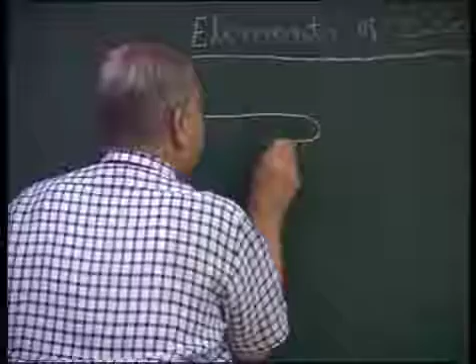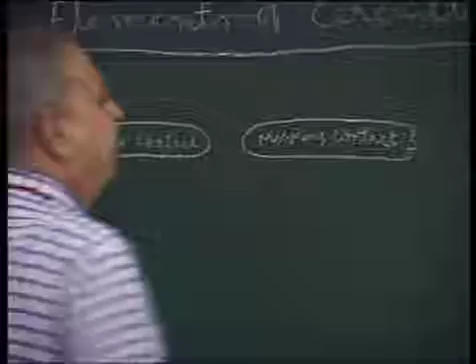Now, in a circuit breaker, there is a fixed contact and there is a moving contact. The moving contact is pressed against the fixed contact under a spring force, and then it is locked.

When a circuit breaker is required to operate, then the lock is pulled out. So violently, under the spring force, the moving contact moves away from the fixed contact and a gap is created in the circuit, and that ultimately switches off the circuit breaker.

In order to keep the contact resistance low during the closed period of the circuit breaker, the fixed and moving contacts are silver plated. A cadmium silver alloy is used for plating the fixed contact and moving contact. This is because silver is malleable, and when the moving contact presses firmly over the fixed contact, the silver gets flattened out and the area of contact between the fixed contact and the moving electrode is maximized. That gives minimum ohm resistance of the circuit breaker.

Now, when the lock is removed and the moving contact quickly moves away from the fixed contact, an arc strikes. And due to this arc, the current does not become suddenly zero till this arc is extinguished. So the entire theory of circuit breaker is how to quench this arc as quickly as possible so that damage is minimized. So we will study how to quench the arc.

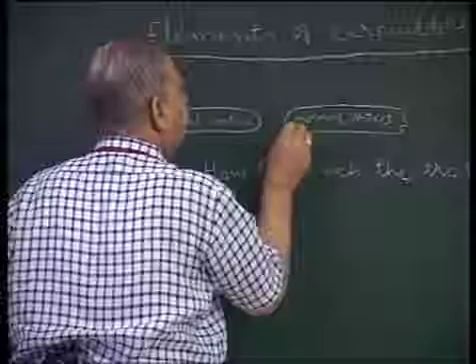Now there are two important components of this voltage. One component is power frequency, and the other component is transient high frequency. As before, opening the circuit breaker, the current and voltages were not in phase. During fault conditions, the power factor is almost 0 lagging, and voltage is leading the current by approximately 90 degrees.

That is, the power frequency component will be such that when the current naturally becomes 0 and the arc extinguishes by itself, at that time the power frequency voltage will be almost at the peak value. And this voltage will rise from 0 to the peak value within a very short period and appear across the contacts.

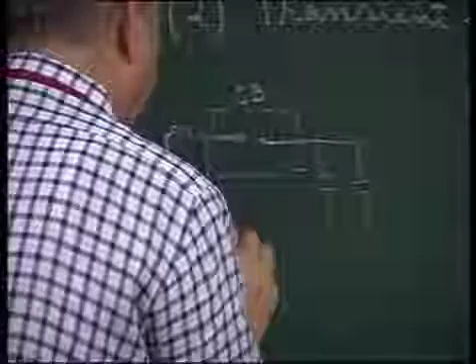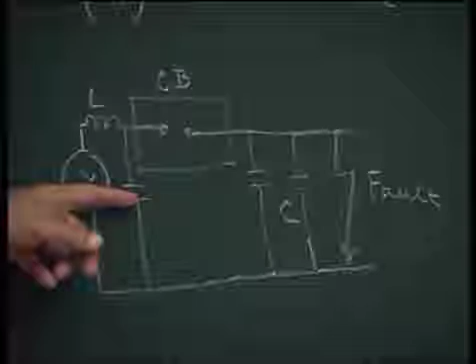So, if this is a source, this is a circuit breaker, so source, a circuit breaker, and there is a fault over here. L is the inductance in the circuit, resistance is very small in the circuit compared to inductance. This is a stray capacitance, and these are again stray capacitances up to the fault point.

At natural current 0, this arc vanishes. The arc at the fault also vanishes for a short period at natural current 0, and these capacitances will like to charge to the maximum voltage of the source, and therefore oscillation will be established between this inductance and these capacitances.

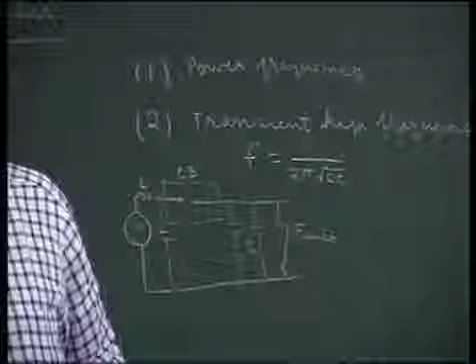Frequency of these oscillations - this will be the frequency of the oscillations. As inductance and capacitances are extremely low, the frequency is very high, of the order of several tens of kilohertz. So that high frequency voltage will also appear, and the power frequency voltage will also appear.

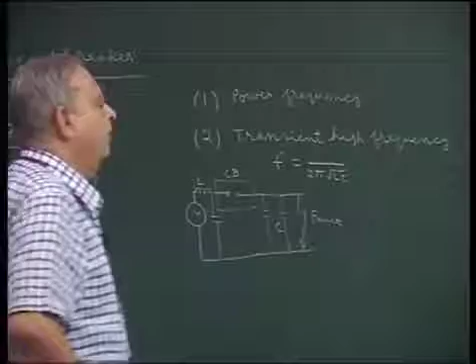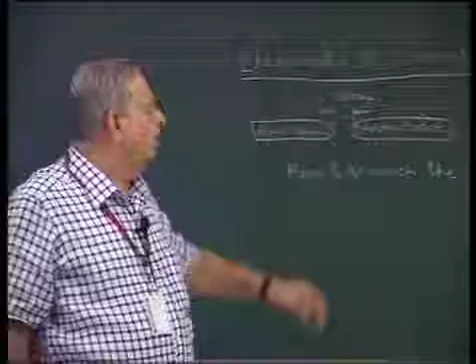Now, whether due to these voltages the arc will restrike or will it not restrike? We should create such situations so that the arc does not restrike. Now, there are two theories to explain whether the arc will strike or the arc will not restrike. The contacts are open, and in all circuit breakers, we make efforts to cool the arc path. This path we will try to cool by forcing more media in between the contacts. Also, we will generate mechanical forces to mechanically move away the ions due to previous discharge.

Now, the rate of rise of restriking voltage theory says that the arc will restrike if the rate of rise of voltage across the contact is higher than the rate of recovery of the dielectric. That is, if the dielectric recovers very fast and the rate of rise of voltage across the contact just after current 0 is not high enough, in that case the arc will not restrike and circuit breaker will successfully open.

And vice versa, if the rate of rise of restriking voltage is high and rate of rise of dielectric strength is not that high, in that case the arc will restrike. So efforts should be made to reduce the rate of rise of restriking voltage so that this may not happen.

Other theory is the heat balance theory. The heat balance theory says that when the contacts are separated, then some ions are in the contact, so there is a resistance due to previous ions present in the arc path. And if the voltage across the contact at any instant is V, then heat generated in the contact region is V square upon R.

So this resistance is R, and heat generated will be V square upon R. This arc resistance is between the contacts due to ions present due to current flowing before current 0. So V square upon R is the heat generated in the contact region, and there is a certain rate at which we are removing the heat by conduction in the media, by convection in the media, by mechanical force developed to remove the ions away from it, and recombination of ions which may also occur naturally.

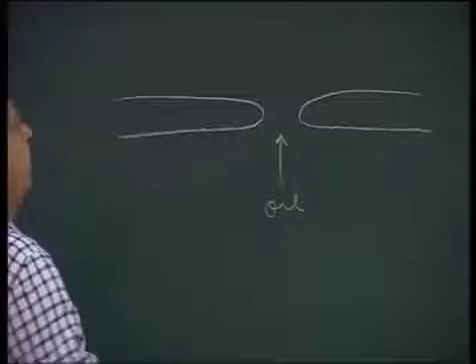Or we can force the oil to flow like this. Efforts will be to remove the ions present in the arc path. This is called a cross blast, and this is called an axial blast.

In the axial blast, the quenching medium or cooling medium is passed along the axis of the electrodes, and in cross blast, the cooling medium is forced perpendicular to the arc so as to blow out the arc.

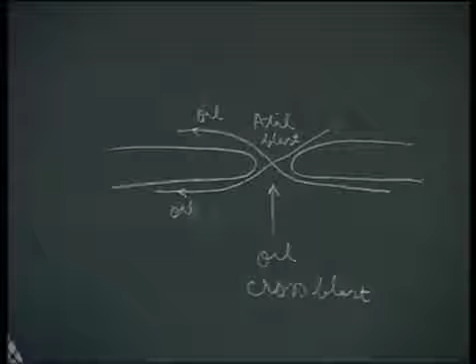Now we understand that in the cross blast, the arc may be blown out very quickly. And in the axial blast, the force on the arc to blow it out is not as strong as in the cross blast.

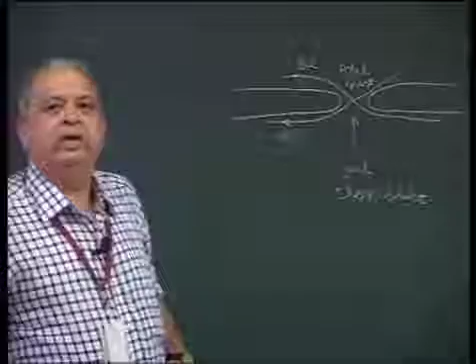Now we will try to see that if the arc is blown out very quickly, that is before the natural current zero, then there is a phenomenon called chopping. Chopping is the phenomenon of blowing out the arc before the occurrence of natural current zero.

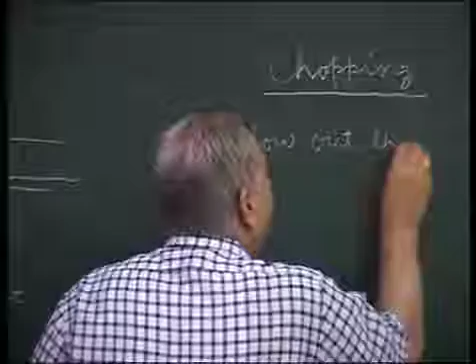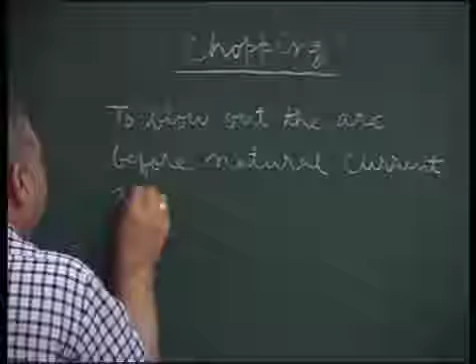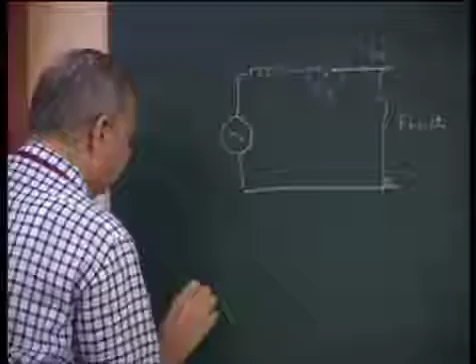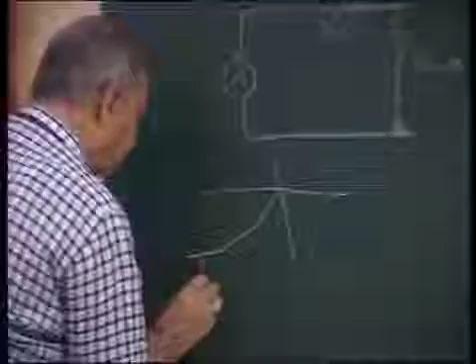Now in the circuit, the arc current flowing at some instant is equal to IA. And if the arc is blown out, say somewhere here itself, where the current IA has not reached natural current zero, but before that we are blowing it out from here.

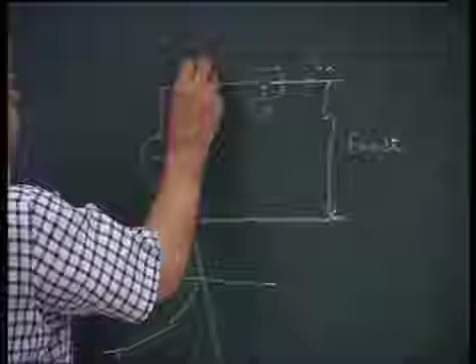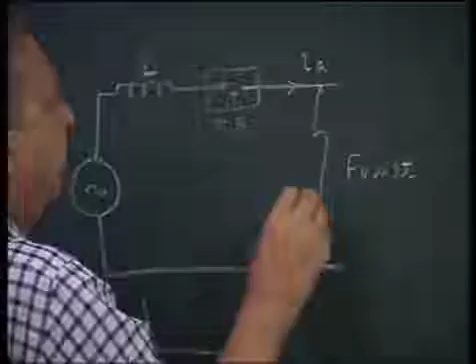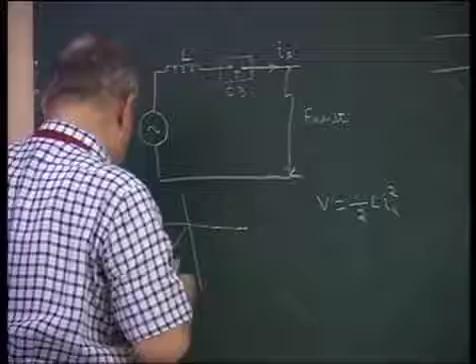There is an inductance, and the effect will be that a high voltage will get induced, equal to what we can write down. So capital V is the maximum transient voltage. Cos of 1 by root LC into T is the wave of high frequency transients.

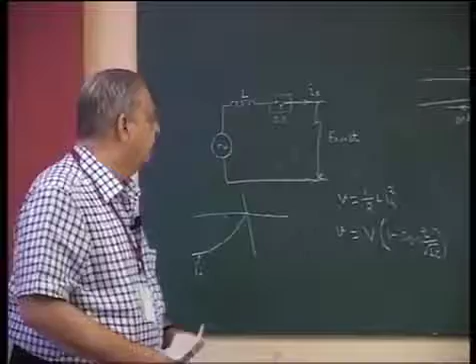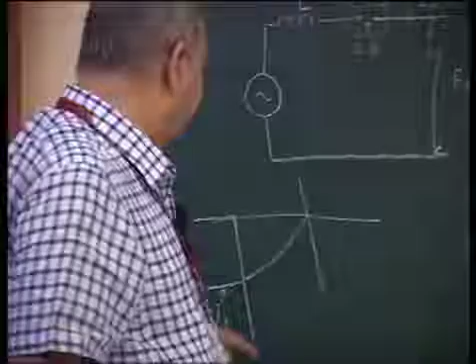Then at any instant T, the voltage induced here, that is between these two points, will be given by this expression. So this is a very high voltage so produced. At this instant, the voltage was zero, and now the voltage suddenly rises to a very high value like this.

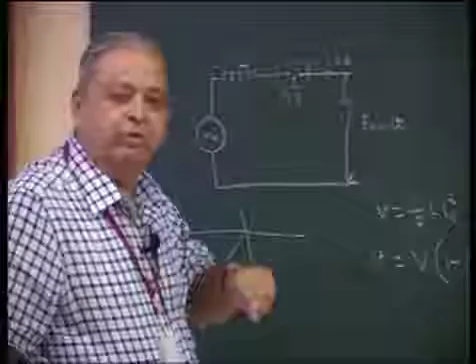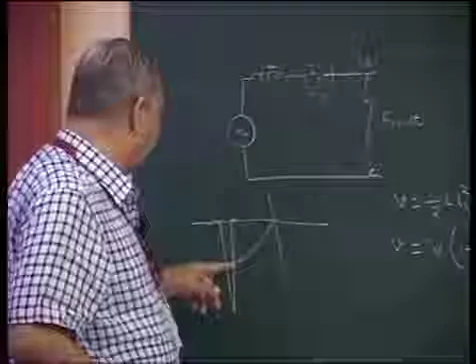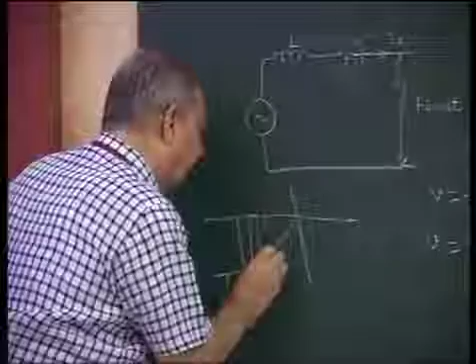And due to this high voltage, the arc again restrikes. It was broken before natural current zero. Now it will restrike before natural current zero. And when it restrikes, the voltage again goes down to zero. Then as this blast is going on, a comparatively weaker arc, now because of lower current, will definitely break the gap and it will restrike the arc, and again the voltage will become zero.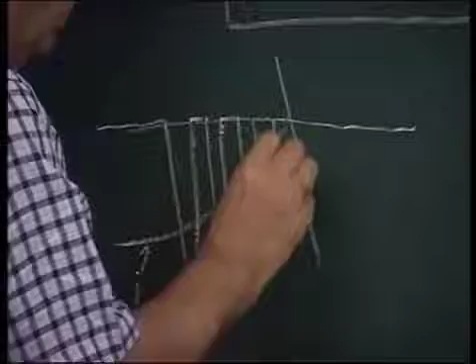Again there is a restrike, and so on till natural current zero comes, and when natural current zero comes, it will not restrike again because the induced voltage will be zero at natural current zero.

So here the current chopping phenomenon gives rise to multiple pulses of high voltage. A single high voltage pulse can be withstood by an insulator, but if multiple high voltage pulses of the same voltage are applied to an insulator, it may fail. So supporting porcelain insulators of the circuit breaker may fail due to this current chopping phenomenon.

So this gives an additional restraint in the design of circuit breakers, that we should apply the blast of oil or air or whatever it is, so that the arc may not restrike after natural current zero. But it should not be so strong that it leads to current chopping.

So current chopping is also harmful, and allowing the arc to restrike will give rise to repeated arcing and therefore delay the opening of the circuit breaker.

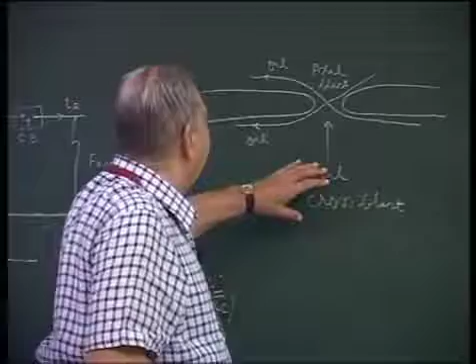Due to this reason, some circuit breakers are designed such that the arc is blown out by axial or radial or a combination of axial and radial force generated by the heat produced by the arc. So if the heat produced by the arc is more, more force to blow out the arc is produced, and vice versa. So for lower fault currents, less blowing out force is produced so that current chopping may not occur, but as the current is low, a lower blast will do to quench it at natural current zero, and vice versa.

Whereas in certain circuit breakers, like air blast circuit breakers, the force to blow out the arc is constant, whether the current is low or high. In both cases it is the same force, and there is a greater possibility of occurrence of current chopping.

Now another method to weaken the arc is resistance switching.

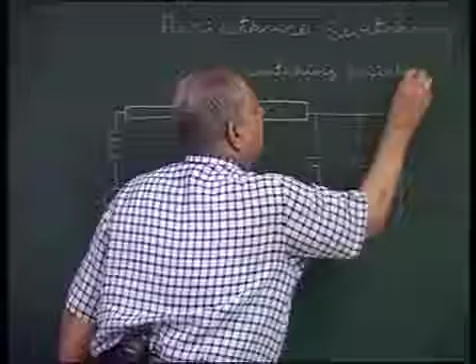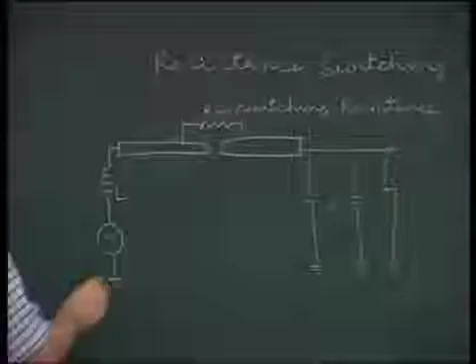Now, if you put a resistance here, this resistance will come in series with the LC circuit, and the frequency of oscillation is modified.

The high frequency transient oscillation frequency is modified, and it is given by this relation. R is also called a damping resistance. If R is low, the second term will be higher.

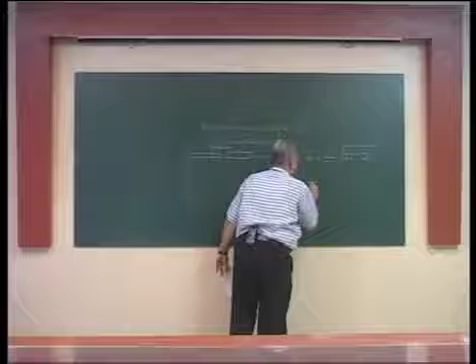So there will be oscillations as long as the second term is lower than the first term. And if R is low enough, and it is greater than or equal to 1 upon LC, there are no oscillations.

So, by properly choosing the value of R, it is possible to totally stop the high frequency transient oscillations.

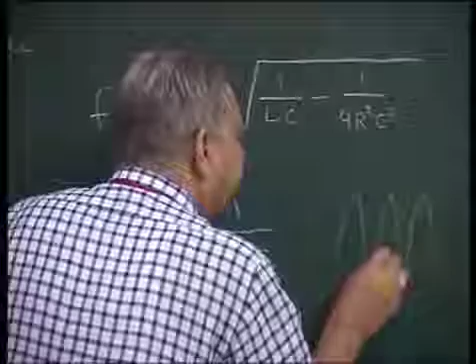And high frequency transient oscillations are the bigger culprit for restriking the arc, because when the voltage is varying very quickly at high frequency, the rate of rise becomes very high as compared to 50 cycle voltage. The rate of rise is very low.

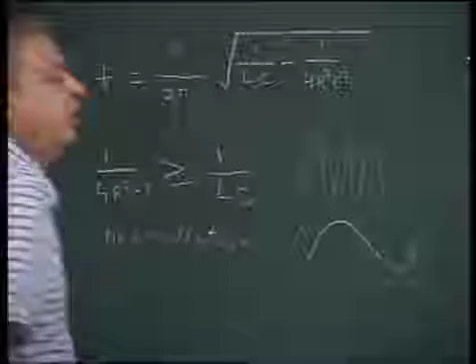So, power frequency rise of voltage is not much responsible for restriking of the arc after the natural current zero. But the bigger culprit is the high frequency voltage, whose rate of rise is very high.

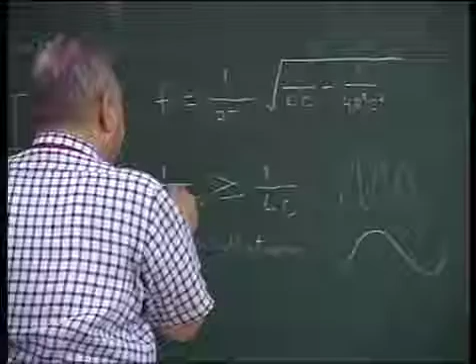And if this high frequency voltage is totally quenched by properly choosing the switching resistance, then the possibility of restriking becomes extremely low.

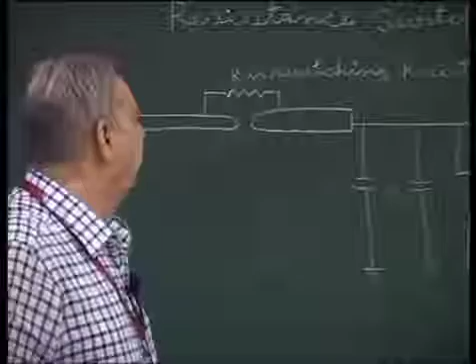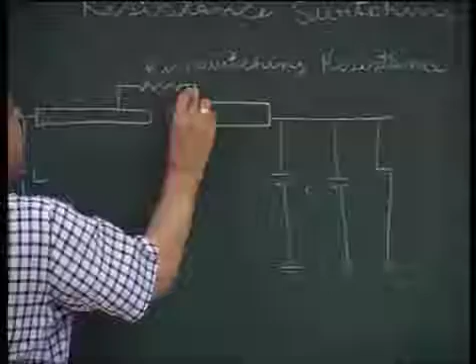But this current may stop, yet this current continues to flow, and we have to put a smaller switch in series with this to produce a weak arc due to this resistance switching.

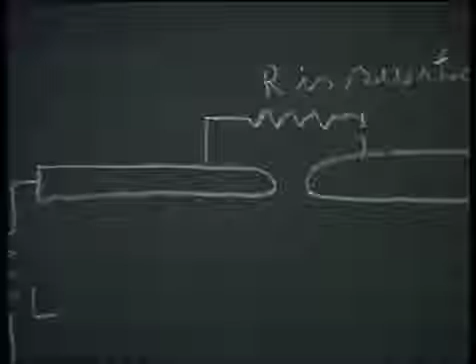So, switching is done in two steps. First we stop the main arc, and then we stop the auxiliary arc.

In bulk oil circuit breaker, a tank filled with mineral oil, that is the transformer oil, is taken, and fixed and moving contacts are arranged inside it.

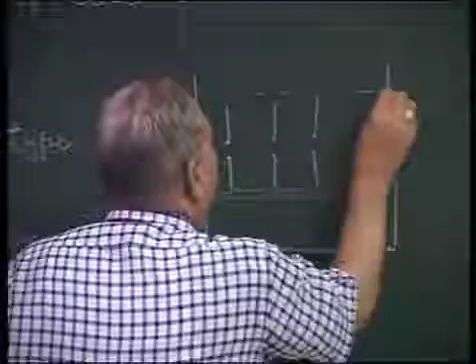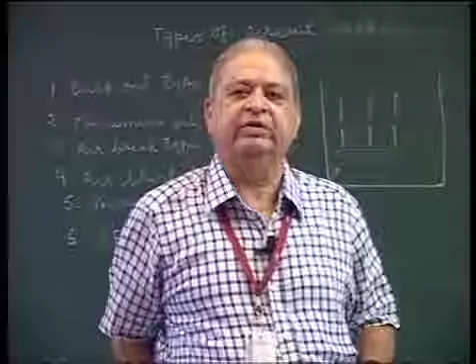So, fixed and moving contacts of all the three phases are dipped in the oil tank. Sufficient clearance is kept between the contacts of different phases and between the contacts and the wall of the tank.

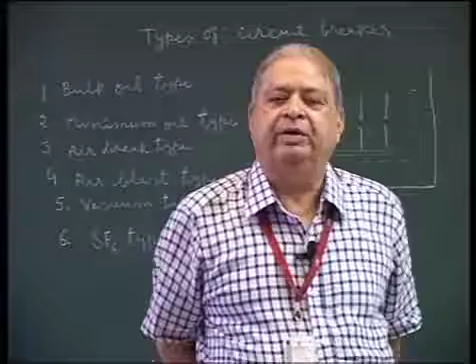When the lower contacts, that is the moving contact, are lowered down, the arc strikes. The arc is quenched by the heat taken away by the oil due to the conduction process as well as due to the convection process.

So, that is the cooling. Cooling is very mild and it can be used only for lower voltages and lower current. So, oil is doing both the functions of insulating the different phases and earth, and also for cooling the arc.

Due to large amount of oil required, the circuit breaker is costly as the cost of oil is high, and at the same time this is a slow circuit breaker, meaning the arc restrikes several times before it is quenched. So, this is a comparatively slow circuit breaker.

But the advantage is that products of the arc, that is the carbon particles and other burnt oil gases which are produced, are of low percentage compared to the bulk of oil. So, the impurities disseminate in the oil and the quality of the oil is not much deteriorated, and therefore it can be used where faults occur very frequently, like in rural lines where faults are more frequent. This can handle that type of situation.

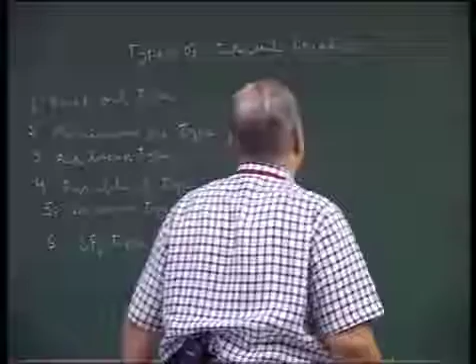So, this is an insulator for the R phase, and there is a separate insulator for the Y phase, and a separate insulator for the B phase. Now, each is a hollow porcelain insulator, and inside the hollow porcelain insulator we have a fixed contact and a moving contact.

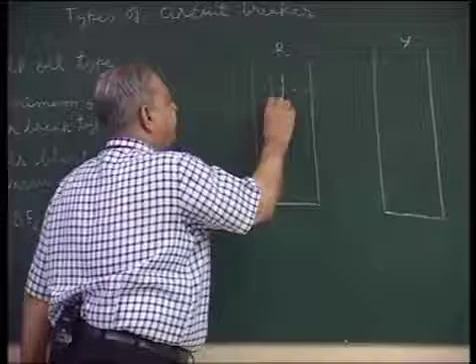This portion is filled with oil, like this, here also like this. This is for the R phase, this is for Y phase, and this is for B phase. These contacts are insulated from earth due to insulation porcelain present here, and between these two the insulation is provided by the porcelain on both. So the oil required for insulation purposes is avoided. Now when the contacts separate, the arc is struck between these two points, and only this much oil will participate in the arc quenching.

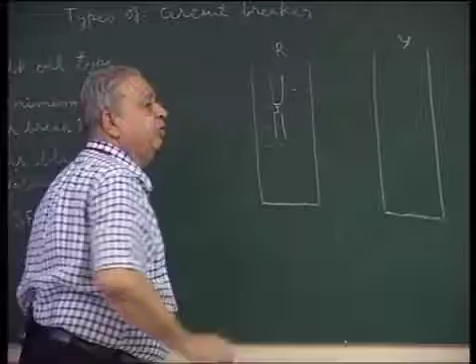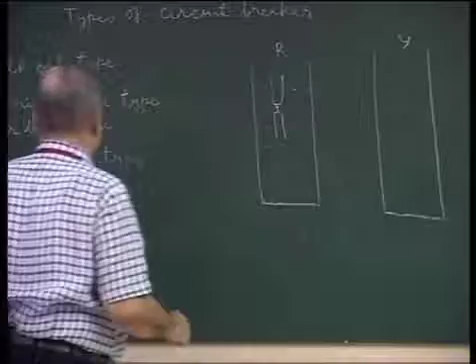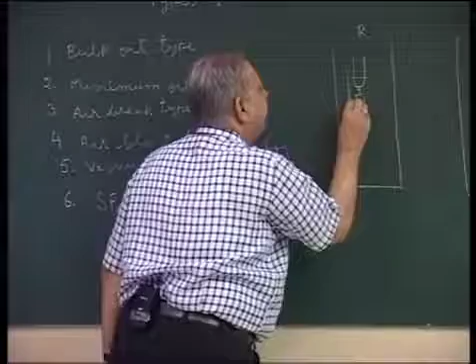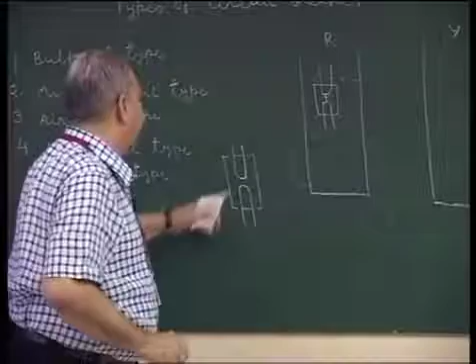As this oil is insufficient, we put arc chutes. An arc chute is a small cylinder kept around the arc, and there are windows cut on the periphery of the arc chutes. Also the fit is not tight, it is a loose fit, so that when the arc strikes, the oil can flow like this, and due to the windows present on the periphery, the oil will also move. So oil moves outside these chutes axially as well as radially, and therefore remaining oil in the bushing is also utilized for arc quenching purposes.

A minimum oil circuit breaker requires only 10% oil as compared to a bulk oil circuit breaker. So there is a great saving in the amount of oil, but in each break some oil gets evaporated, some oil gets burnt due to arc, and frequently after 4 or 5 breaks we may have to check the oil level and top up the oil.

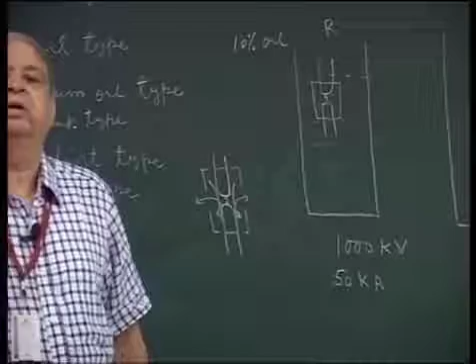Minimum oil breakers have been designed for voltages up to 1000 kV and for currents up to 50 kiloamperes. This is the most popular circuit breaker in most substations, because it can satisfy most requirements. These are again low duty circuit breakers, and they use only air.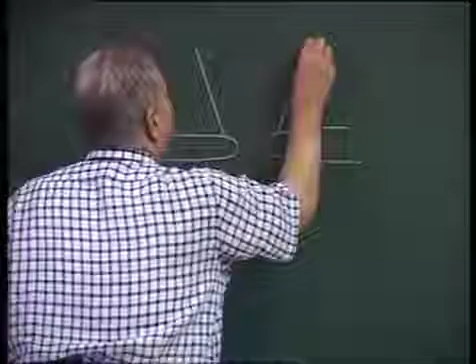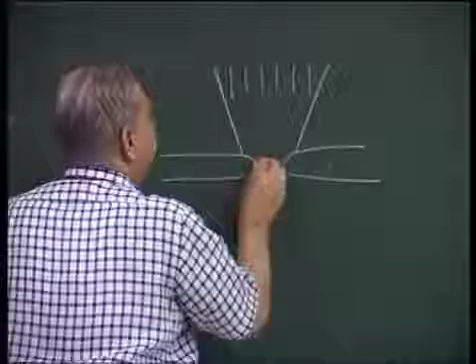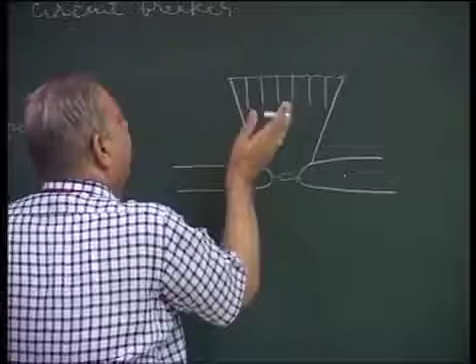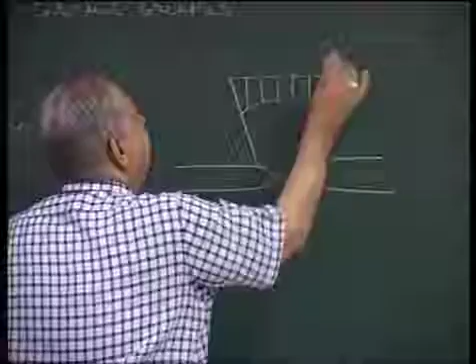So this is the fixed and moving contacts, and these are metallic horns. In between there are many metallic plates insulated from each other. When the arc strikes here, due to the heat of the arc it takes a convex shape, and then it is blown up into a number of arcs occurring between the plates. So there is a lot of cooling of the arc, and air is blowing in this direction here.

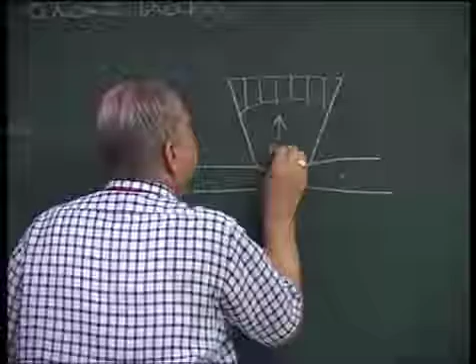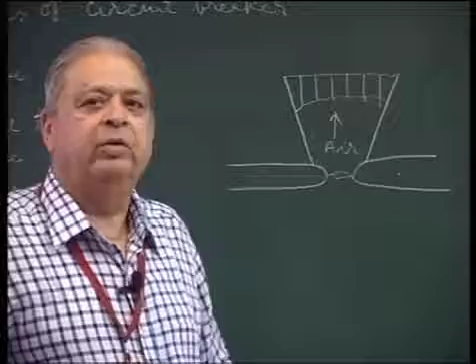The arc is ultimately quenched. This is a slow circuit breaker, and there is no possibility of chopping here. It takes a long time to blow out and is suitable for low duty, that is for lower currents. If this is to be used for load breaking purposes, this is quite a suitable circuit breaker.

In air blast circuit breakers, we make use of a separate air compressor, and a high pressure air blast is thrown over the fixed and moving contacts. Due to the high pressure air blown over the contact, the arc is blown out. This is a very strong circuit breaker. The air is thrown only for a very short duration, just for less than a second, and the arc is blown out. There is a violent sound created due to operation of the circuit breaker because of the high pressure air injected on it.

This is also a very popular circuit breaker for 220 kV and above, but we have to maintain compressed air separately for this purpose, so this is the disadvantage. There is no oil in it, therefore there is no risk of fire, etc. It is also a popular type of circuit breaker. The amount of air used is very little, and once we charge the compressor fully, we can operate it several times.